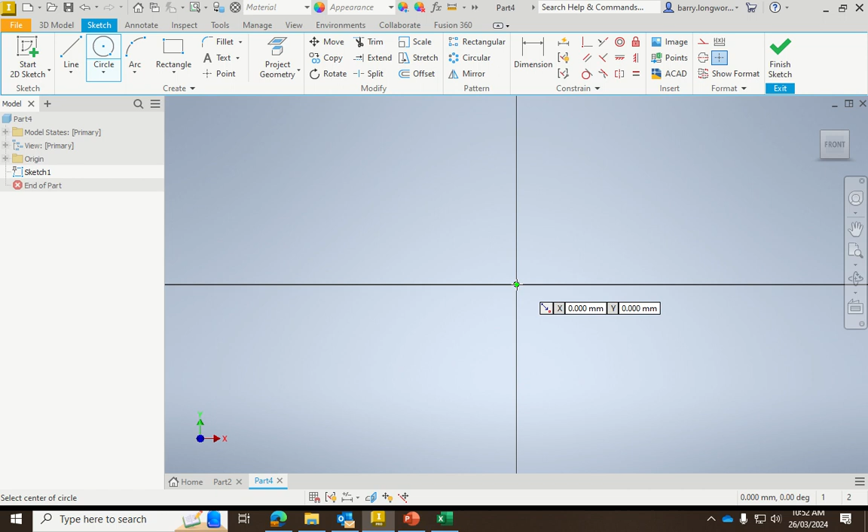So I'm going to start a sketch on the XY plane, and I'm going to draw two circles this time, and the circles are going to match the size of my ring. So I'm going for a size S ring, which is 20.4 millimeters in diameter.

I'm going to draw another circle on the outside of that, and this time I'm going to go 3 millimeters bigger than that, so 23.4. Okay, so we've got two circles. The inner circle is my ring size, the outer circle is the ring size plus the thickness of the metal that I want around the outside, times 2, okay, because we're dealing in diameters.

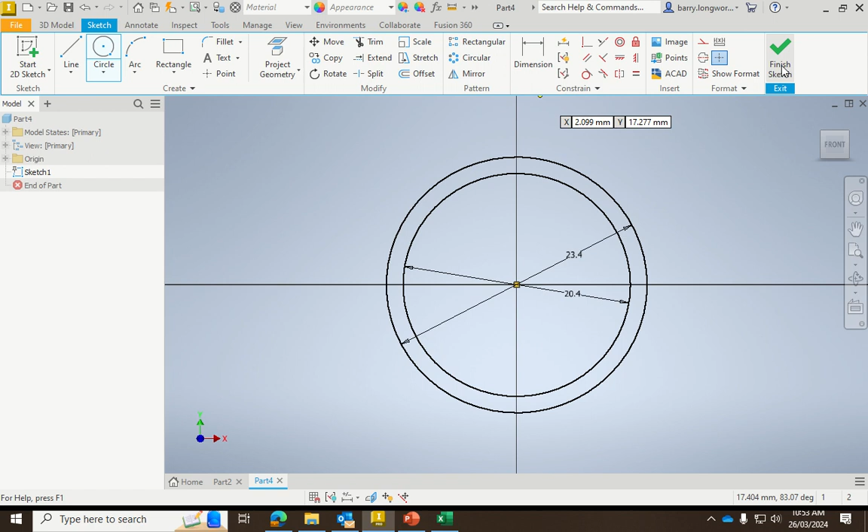Finish that sketch and extrude it. And you can see here we're going to extrude this one to, let's just say, 7 millimeters, okay, like so.

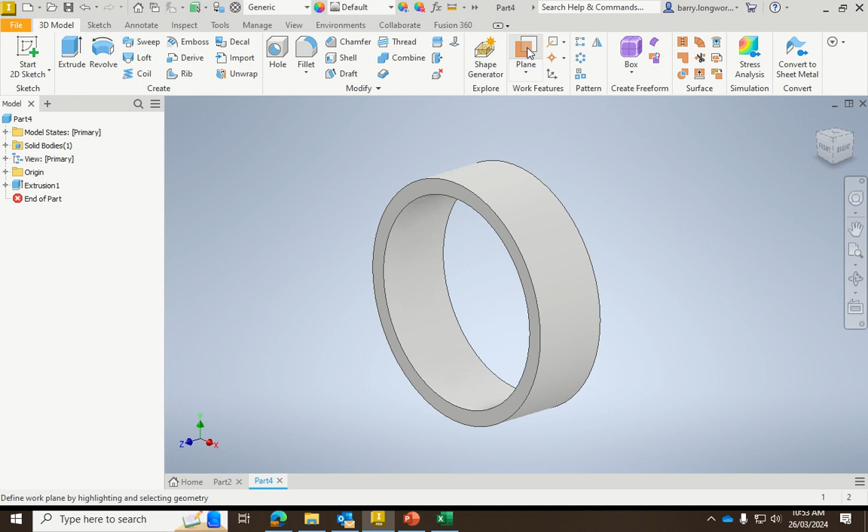Alright, so just like with the signet ring, we're going to draw a sketch on this surface here. Okay, so I need a work plane. I need it to be parallel to the YZ plane, and I want it to be tangent to that face there, so the circular face there. Then if I click on that work plane, it gives me the option to create a sketch, and that's just what I want to do.

I'm going to start by drawing a rectangle on here, because what I'm going to do here is I'm going to create a pattern that I can repeat around the surface of the ring to make it look a bit more interesting.

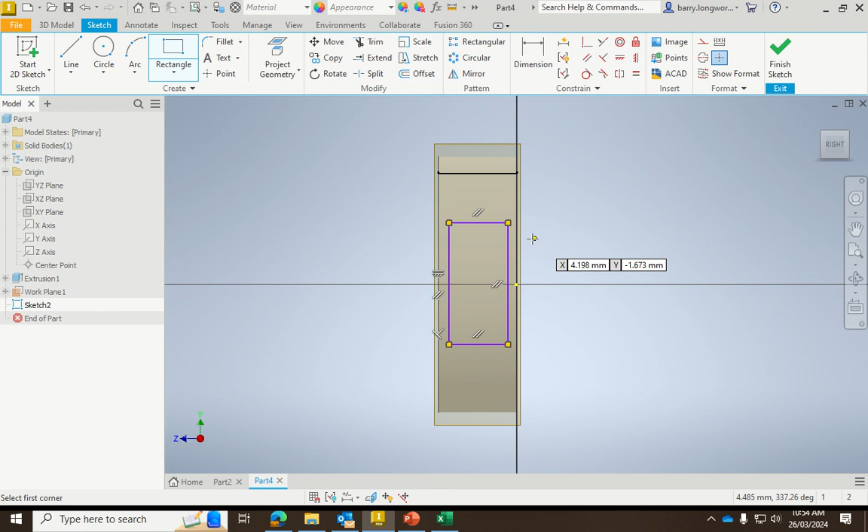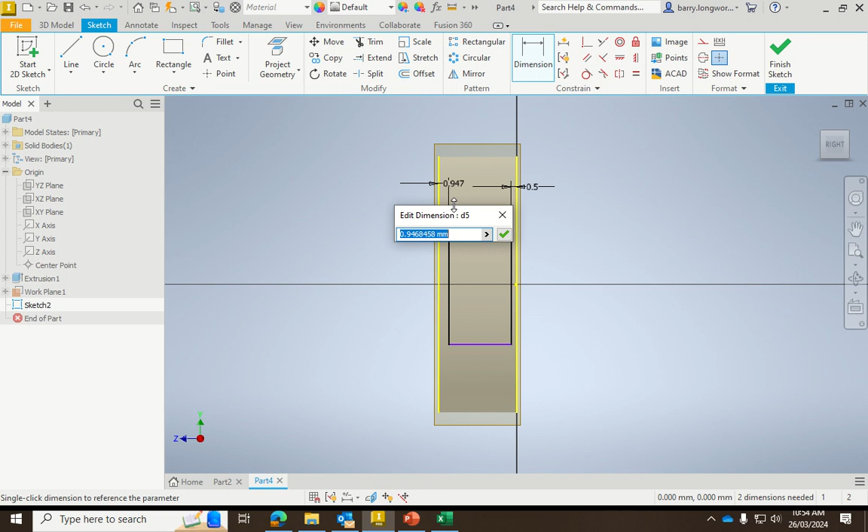So I've got a rectangle there. I'm going to make my rectangle so that it doesn't go all the way out to the edge of my ring, so I'm going to leave 0.5 of a millimeter between the edge and the rectangle. Okay, and I'm going to make this one the same as that, so I'm just going to click on that 0.5 and it will be the same size.

For the length of the rectangle, I need to make it so that when I do my pattern it will meet up perfectly.

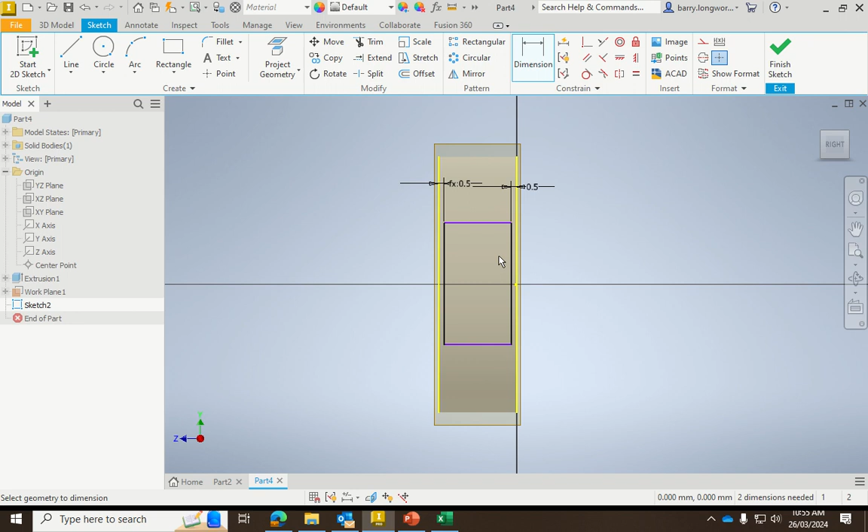Okay, so in order to do that I need to calculate the circumference of my ring, the circumference of the outside of this ring, and divide it by the number of times that I want to repeat the pattern. So in this case I'm going to go 10. Okay, so I want 10 times around here. Alright, in order to do that though, I need to know the circumference of this.

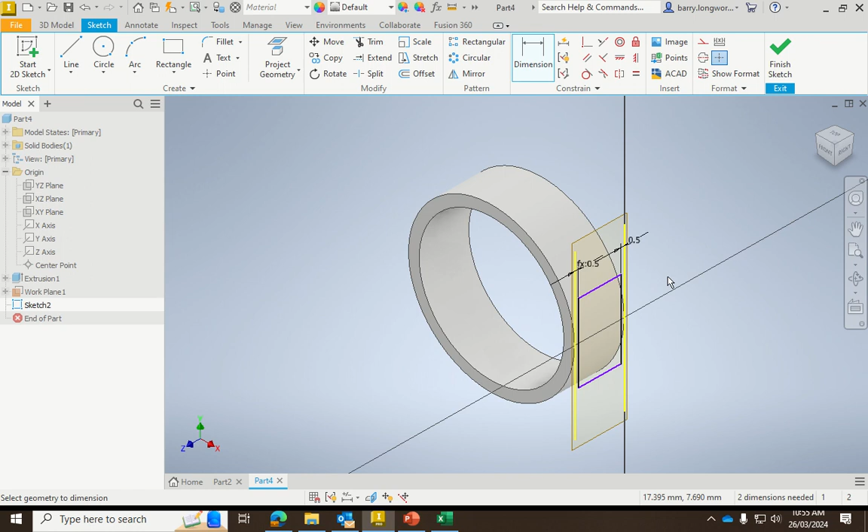Alright, so what I can do is I can say, I'm going to use a formula for the dimension of this line here. So let's just go back here. Okay, so this one here, okay, the length of that line I want to be a 1/10 of the circumference of that outside circle.

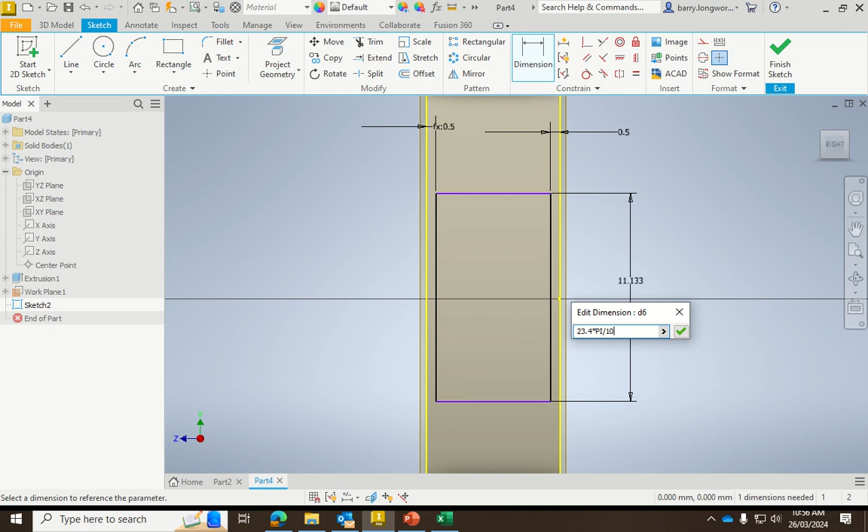Okay, so my circle was 23.4 millimeters. I can then times that by, and use the asterisk for times, pi, because as we all know, circumference equals pi times diameter. Alright, then I'm going to say I want to divide all of that by 10. Alright, and then when I tick my green tick there, it'll actually give it a number. Alright, but the number is equivalent to the circumference of that outer circle divided by 10.

Okay, so I'll just show you that again. So it's 23.4 millimeters times pi. Okay, the circumference of a circle is pi times diameter, and then divided by 10. Alright, that's the hardest bit.

Okay, what I'm going to do now is I'm going to align with a vertical constraint because my sketch is on its side for some reason.

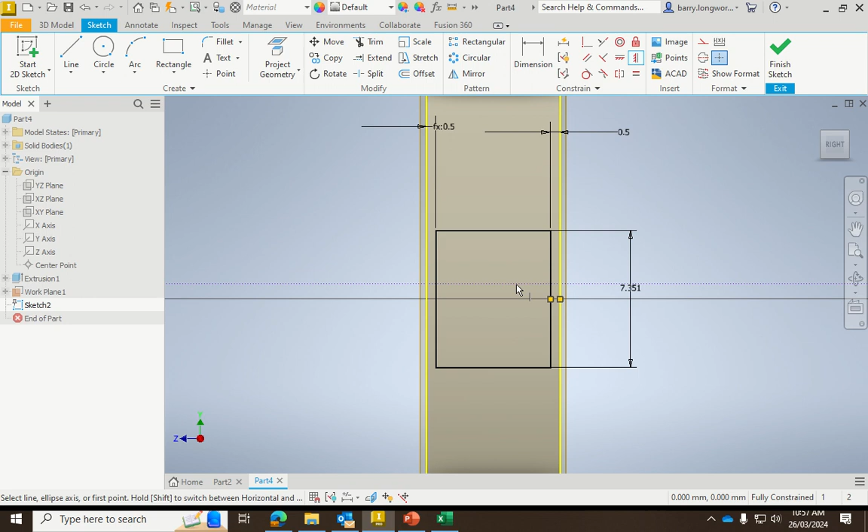So I'm going to vertically align the midpoint of the rectangle with the midpoint of that line or that circle, and that way my shape is lined up there. What I'm also going to do is make all the lines for my rectangle construction lines, so they won't be included in my final sketch.

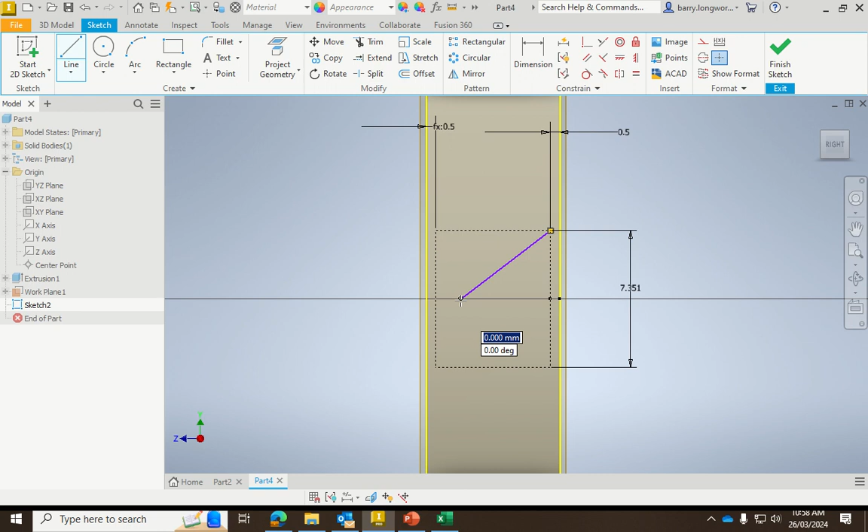Now for this one, I'm going to do a basic zigzag pattern all the way around. I'm going to draw a line from here down to there and then across to there. I'll draw another line, and now I'm going to make sure those two lines are equal with each other, and they are coincident with the corners of my rectangle.

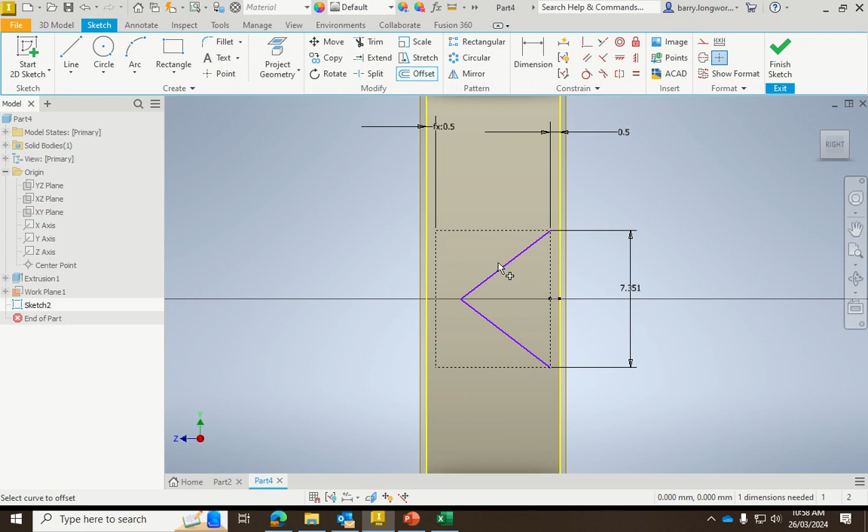Then I'm going to do an offset from that shape, and you can see it actually chooses all three lines, so I'm offsetting the triangle so that they're all equal all the way around. I could have also done a parallel constraint, but I'm just going with my offset as a bit of a shortcut.

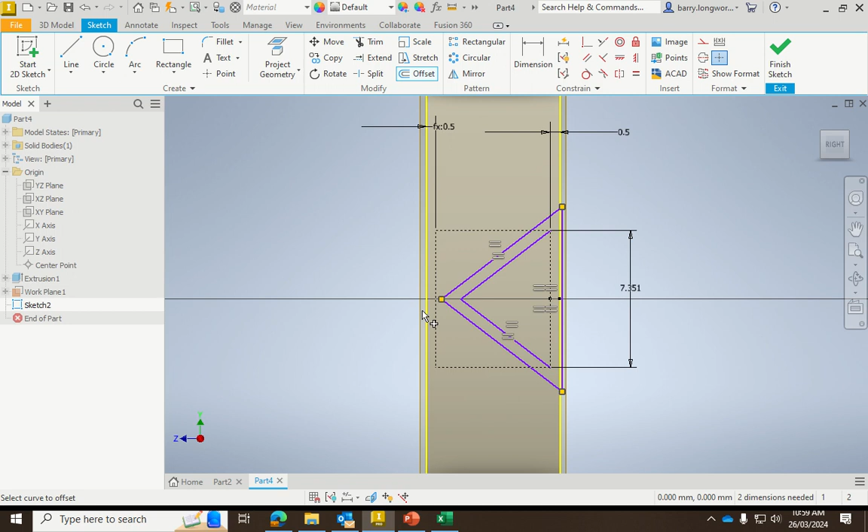I'm now going to put a coincident constraint between that point and that point, which is the middle of my rectangle. You can see it changes the angle slightly, but it's now right in the middle there. Now I'm going to trim some lines off.

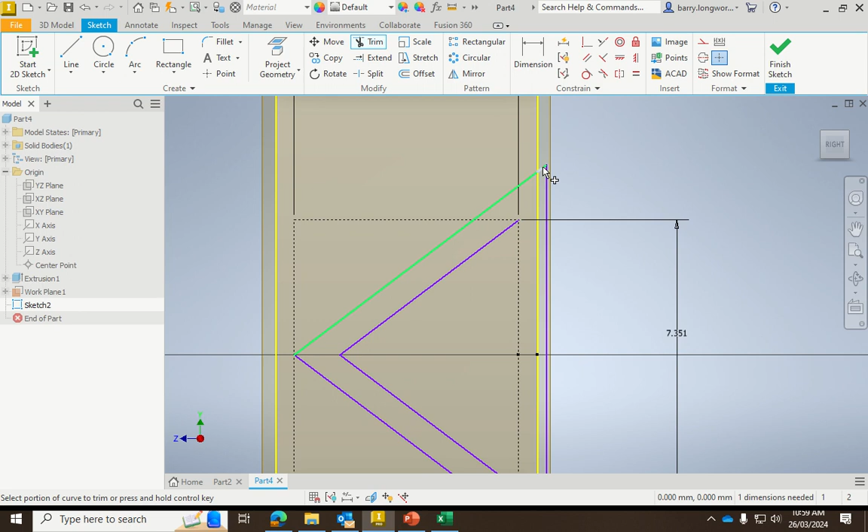So I'm going to trim that and that, trim that and that, and also trim that one and that one and that one. If I don't want to do all that trimming, I can just select the line and delete it because I'm getting rid of all of that line.

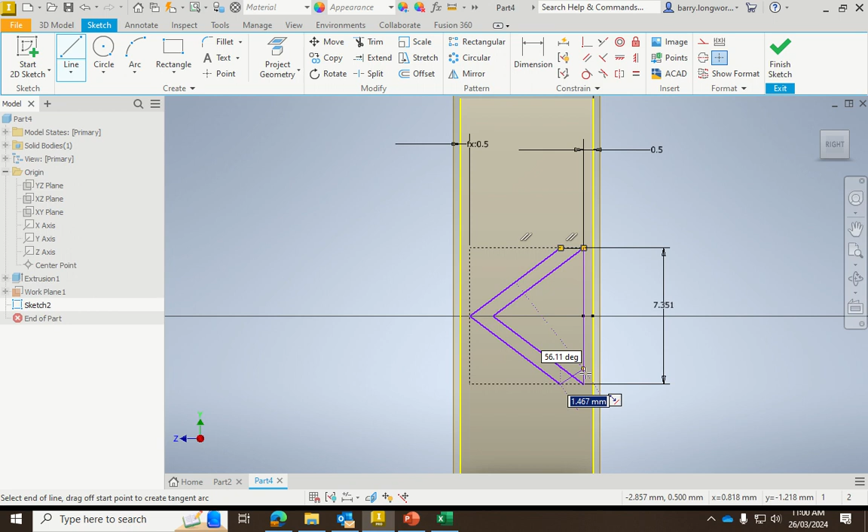I need to enclose the shape, so now I'm going to do a little line from there to there and a line from there to there, and so now I've got an enclosed shape. Something went a bit wobbly there, so I'm going to do my coincident constraint between the end of that line and that point, and there it is. Now I'm going to finish that sketch.

So I've got a V shape on there. That's one zig, or a zig and a zag, and so I'm going to repeat that pattern all the way around.

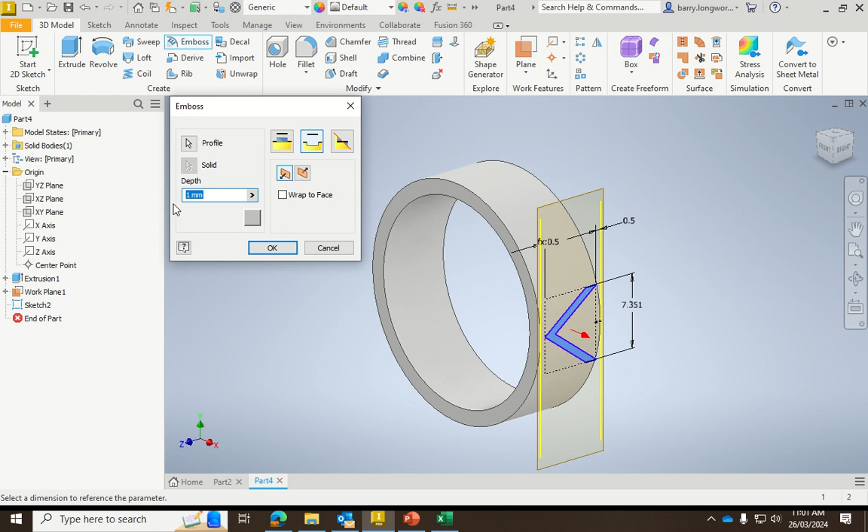I'm going to use an emboss. Now if I was to extrude this pattern all the way through, my ring would fall in half. So in this case I only want to go halfway through, or less than half. I'm going to go 0.5 of a millimeter, and I'll say wrap to face because I want it to wrap to that face there. Then I'll say OK, and you can see that it creates a groove there.

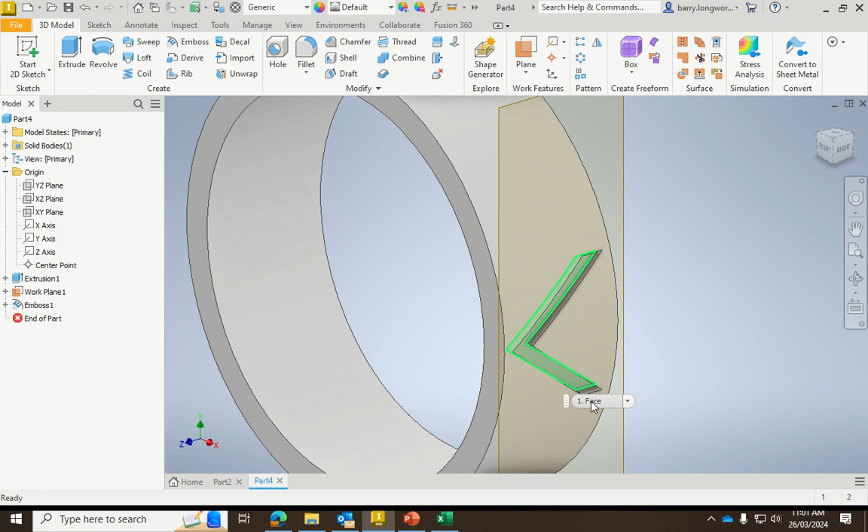The difference between doing it this way and doing it as an extrusion is that an extrusion, because it's going through parallel, doesn't work out the same. So it won't follow the curve, whereas this one will because we're using the emboss.

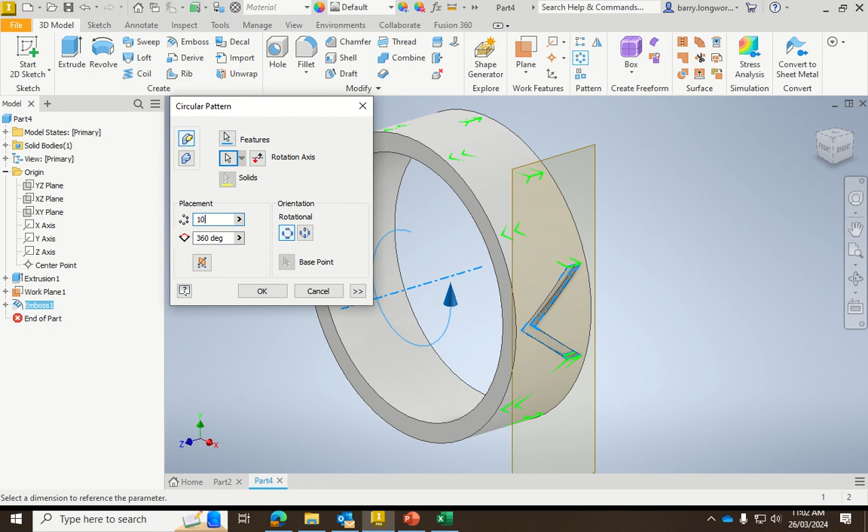Then it's just simply a matter of repeating that pattern 10 times. So if I select the emboss from my model browser, I can do a repeated pattern around this rotation axis, and if I put in 10 and go OK, you can see that it creates that pattern which is all neatly joined up all the way around there.

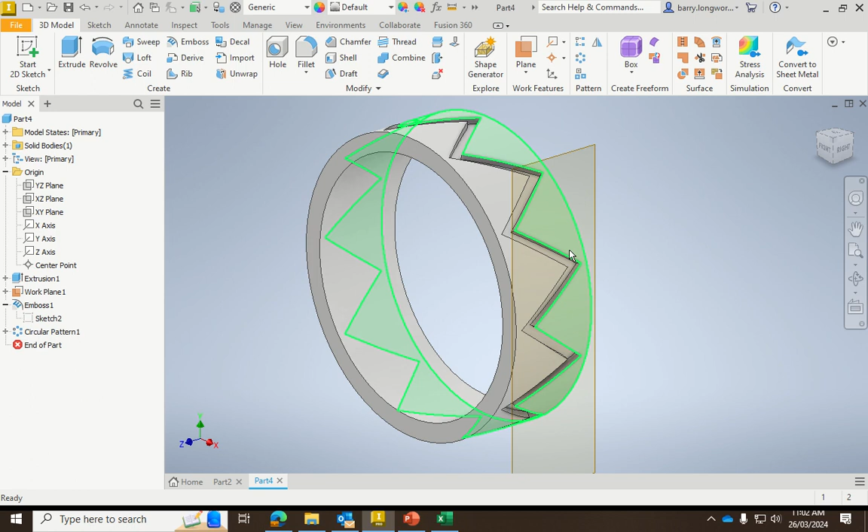Now if I want to add more detail to this, obviously I can go back to my sketch and add some more things, maybe a couple of circles or something, but that's the basics there of how you do it. So that's another way of creating a ring for Inventor.